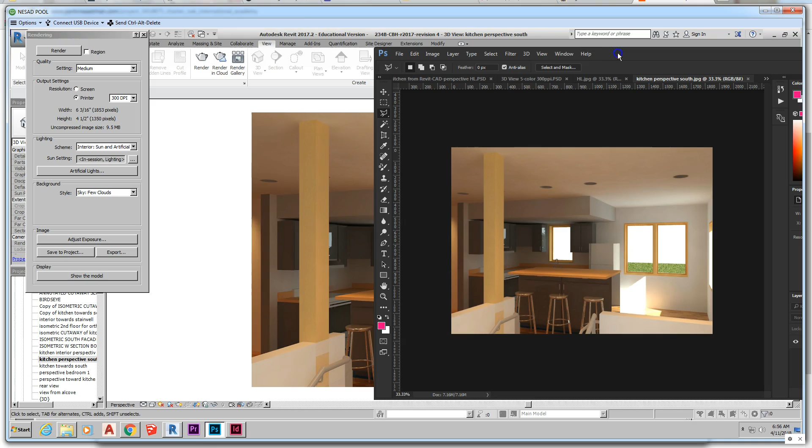First thing I'm going to do is go to the hidden. I have all these other lessons for my students here. I'm going to close. It's

Okay. First thing I'm going to do is go to the hidden line drawing. Check the image size. Make sure that it's the same pixel dimensions. These don't really matter. When you're working in Photoshop, the pixel dimensions are key. That's all that you need to look at.

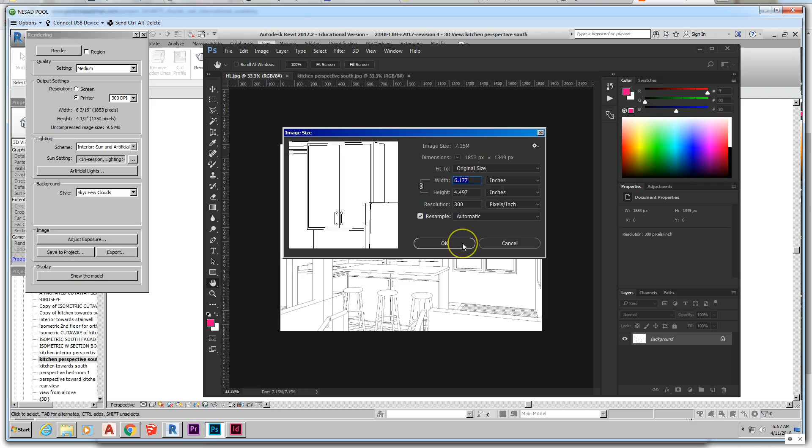1853, 1349, select all, copy, and then go to our kitchen perspective. Check the image size on it just in case. Same pixel dimensions, and just paste. So now we have a line drawing layer. Let's call it the hidden line.

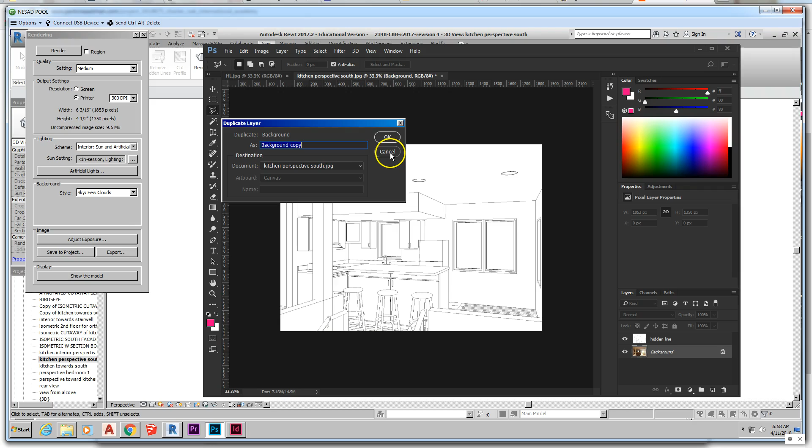The background is simply the drawing itself. I'm going to duplicate it. It's a good idea to do that in case you perform any destructive commands in Photoshop and you inadvertently modify your drawing. So let's just call that kitchen base color layer.

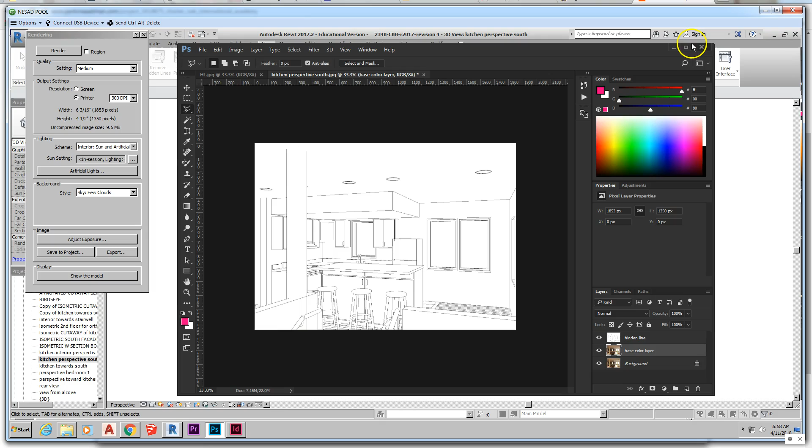Now, I may not get to the third. I'd like to add a dimension of depth. We often composite a third wireframe representation of the model. But I want to sort of illustrate this mode of rendering. So let's maximize Photoshop, because now we're going to be working almost exclusively in it.

Double-clicking the hand tool centers the object there. Now you can see that I'm looking at my hidden line layer. Let's turn off the background layer. Not that it would make a difference, because the base color layer is opaque. You can see that I could vary the opacity of this drawing, the hidden line drawing, and you get a gentle outline of what's going on there.

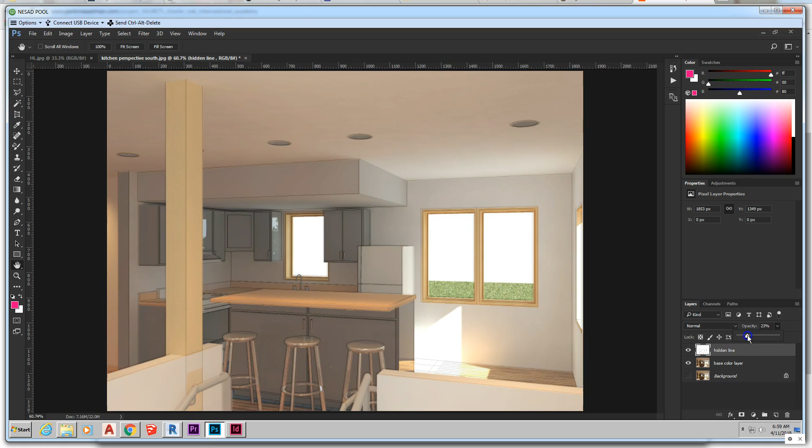But the real effect is achieved when you combine the blending modes, which is done here with this layer drop down. So multiply actually takes the image and composites it with the color layer below. Varying the opacity will give it a little less of an outline, right? Let's pause here a second. So those are the elements that we're going to be working with.

Let's go back to the plain old normal opaque mode and talk about a couple things we need to do. We need to modify this drawing to get rid of this arbitrary background outside the windows. So I'm going to create a selection. Very important to be able to do this in Photoshop. I teach this to IDC students and advanced IDC students as well.

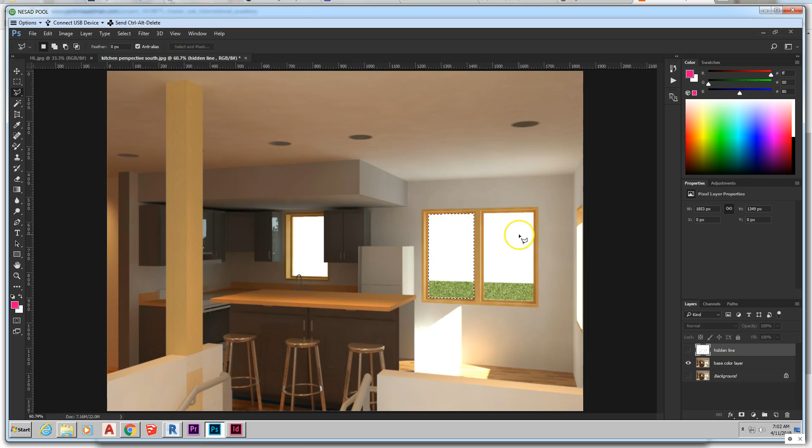Using the polygonal lasso tool, it's easiest to outline angular shapes. Hold down the Shift key to add to that selection. You only need to tap it once, and then whatever you draw will be added. Shift again. Now we're going to nuke the top of that faucet. So we're going to have to live with that level of imperfection.

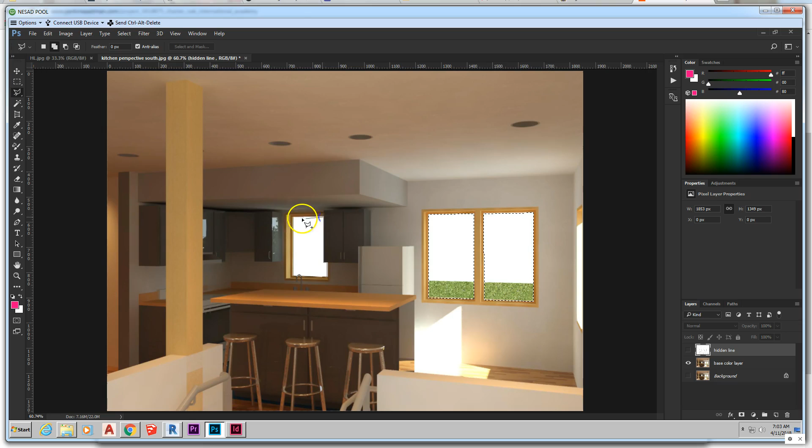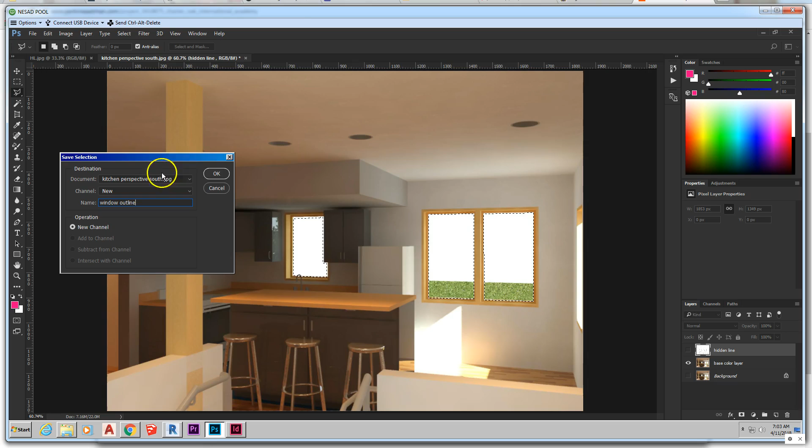So there's a selection that I want to save because I want to draw into that in order to create a background. It's amazing how quickly that brings a drawing to life. I'm going to select, save that selection, and name it something meaningful. Window outlines. Okay?

When you do that, that shows up in the channel, and you can illustrate what it is by selecting that channel there. It's beyond the scope of what we're doing here, but just so we know. So that we can invoke that selection at will. Control D to deselect. Select, reselect. Okay, if I delete what's in the window, I get a transparent background. Okay, we'll deal with that later.

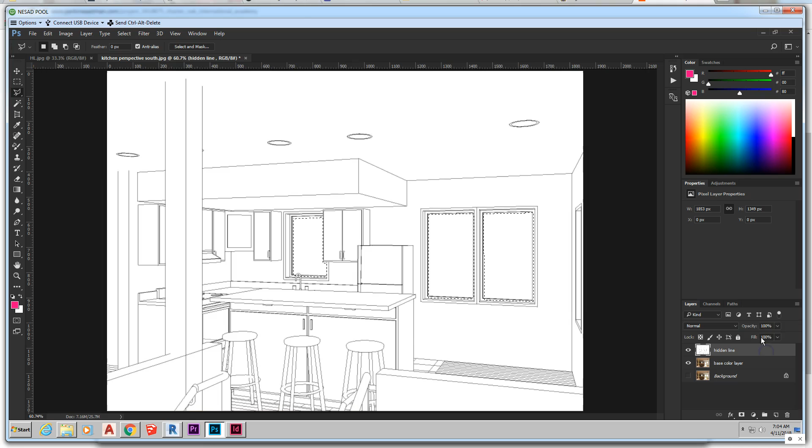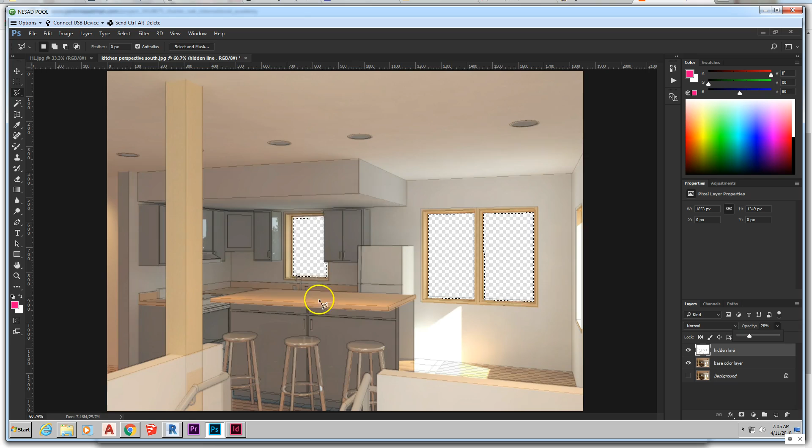So I've modified the base color layer drawing in preparation for compositing these two drawings, these two layers. And that's the result so far. In lesson 3, we'll do the masking that allows us to blur the edges and create a center of focus of part of the drawing that creates a little more excitement than just rendering the entire thing as one big picture.